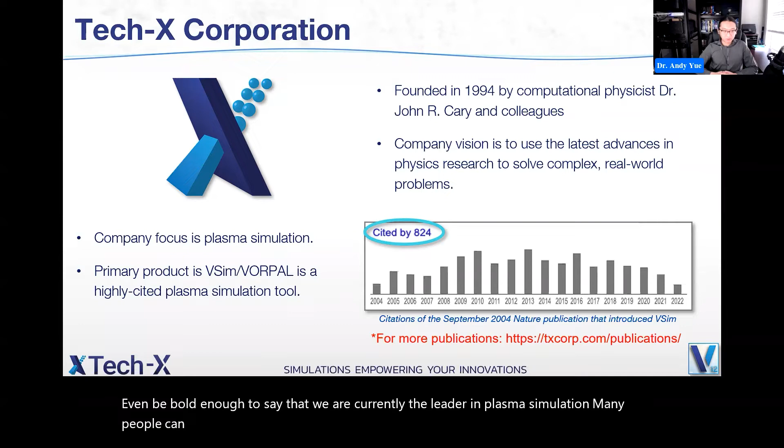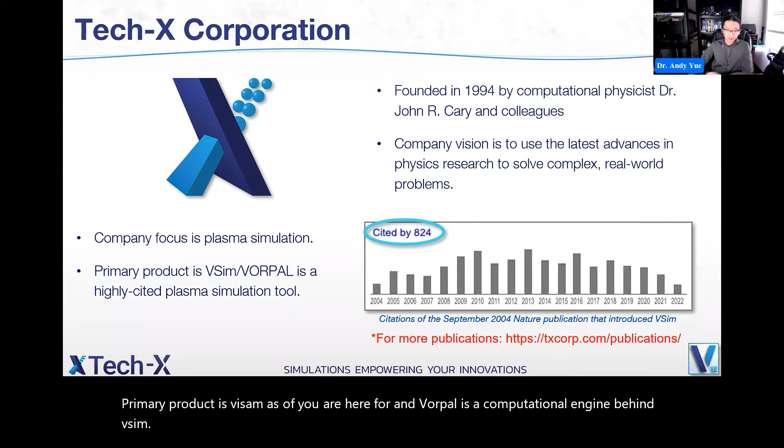So our company, TechX, has a focus on plasma simulation. And I would even be bold enough to say that we are currently the leader in plasma simulation. Many people can do electromagnetics. Many people can do ordinary particles. Not a lot of people can do plasmas. So our primary product is VSim, as all of you are here for. And Vorpal is the computational engine behind VSim. So let's go to the next slide.

So what is VSim? VSim has multiple physics solvers. We solve fields, that's electromagnetics and fluid. We solve particles, that includes charged particles like electrons and ions, and it also includes neutral particles as well. And we solve collisions and reactions, that is the interaction between particles, such as ionization, recombination, excitation. And we solve all of these in self-consistent ways, simultaneously, and the result can be trusted and is robust.

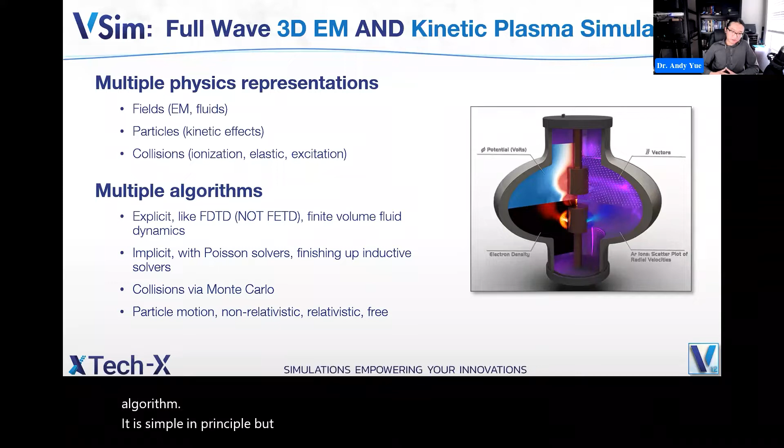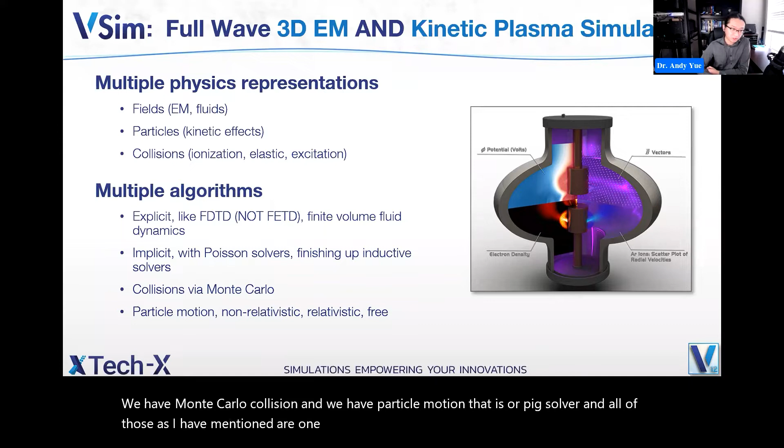So we have many different solvers. The main solver we use is FDTD, that's finite difference time domain. So VSim is a time domain solver. And finite difference is a very, very robust algorithm. It is simple in principle, but it's not really that simple to implement. There are many nuances there. And we also have implicit solvers like Poisson solvers and inductive solvers. We have Monte Carlo collision, and we have particle motion, that is our PIC solver. And all of those, as I have mentioned, are one unified self-consistent whole.

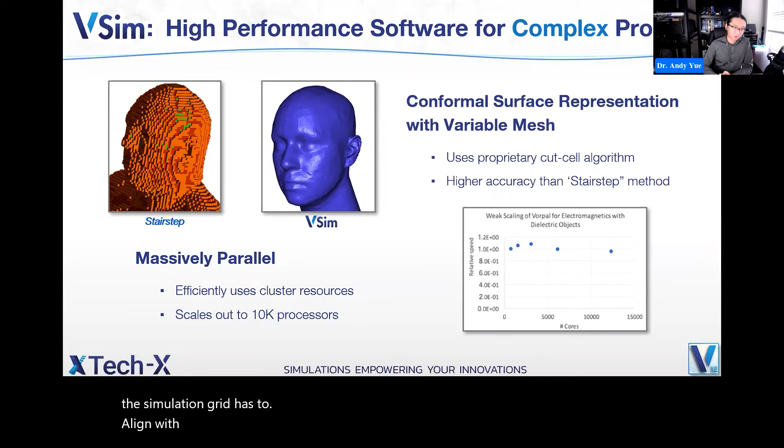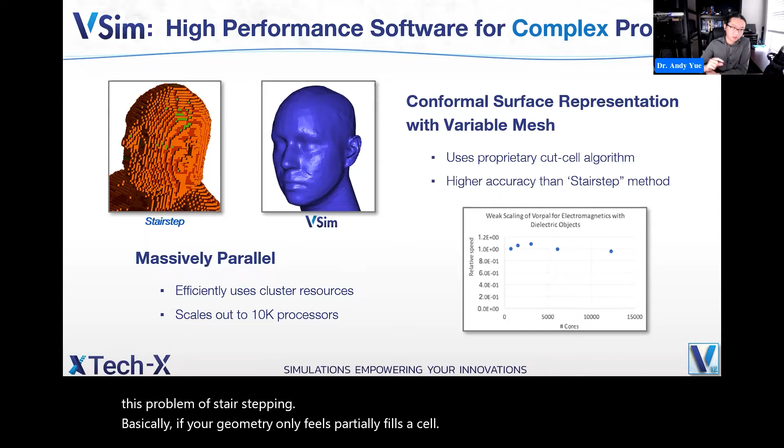So one main advantage of VSim: if you know anything about finite difference solvers, the simulation grid has to align with whatever coordinate system you're using. So in Cartesian coordinates, you have this problem of stair stepping. Basically, if your geometry only partially fills a cell, with stair stepping, you either count the cell as entirely filled or empty. But VSim has a conformal surface representation with its cut cell algorithms, and we are able to have a much finer resolution of the simulated geometry and hence improve accuracy.

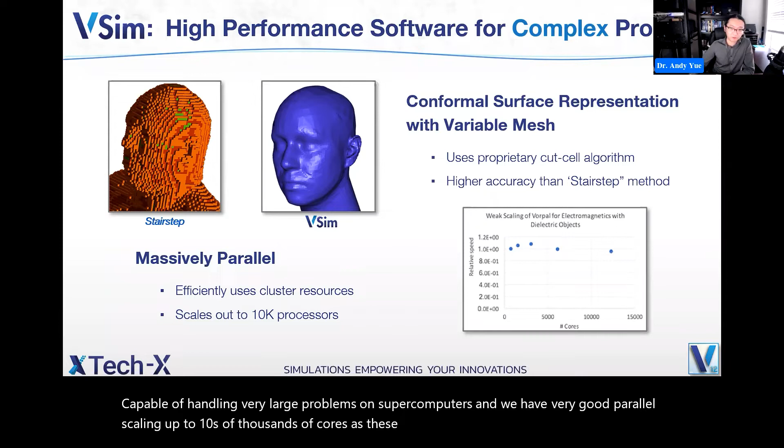And VSim is a massively parallel solver. So we are capable of handling very large problems on supercomputers. And we have very good parallel scaling up to tens of thousands of cores, and these are tested and confirmed numbers.

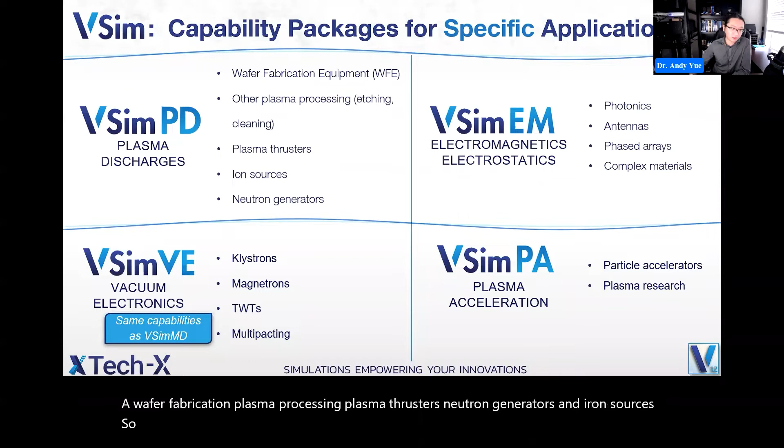So VSim is currently divided into 4 different packages depending on their capabilities. Our flagship product currently is VSim PD. PD stands for plasma discharge. This product is intended to solve problems such as wafer fabrication, plasma processing, plasma thrusters, neutron generators, and ion sources. So this package is great for anyone who is doing reactions, plasma chemistry, and especially processing. We will talk about that more a little bit later.

We also have VSim EM, which stands for electromagnetics. These applications include your ordinary applications such as antennas, phased arrays, electromagnetic waves in materials, and more importantly, lately photonics. We are able to go to very, very high frequencies while maintaining stability.

And we also have VSim VE. VE stands for vacuum electronics. This package used to be called MD. We changed the name in this release to align with industry conventions. So these applications are klystrons, magnetrons, TWTs, and multipacting. Basically, applications that have anything to do with beam-field interactions.

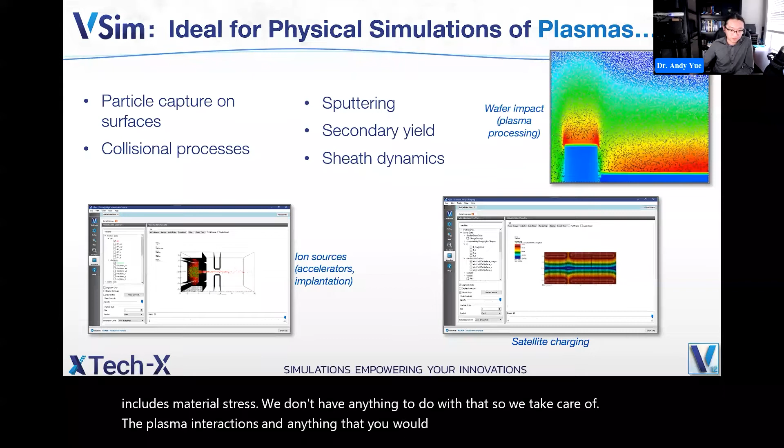And I would mention here that what VSim does not deal with currently is anything mechanical. That includes thermodynamics, that includes material stress. We don't have anything to do with that. So we take care of the plasma interactions and anything that you would consider electrical.

So VSim is also capable of solving computationally intensive electromagnetic problems. And as I have mentioned, we have conformal PECs and dielectric algorithms. Conformal means we are able to go into the subcell level and take care of complex geometries within the cell.

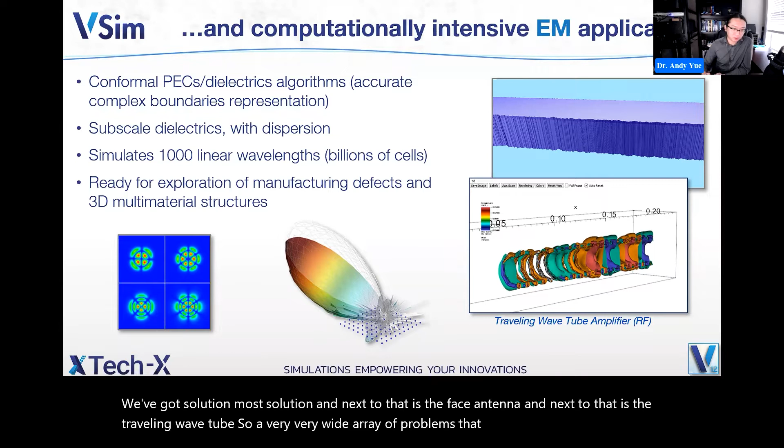So we can do problems, as you can see here. On the bottom left corner is a problem of a waveguide solution, mode solution, and next to that is a phased antenna, and next to that is the traveling wave tube. So a very wide array of problems that involve either fields alone or fields and particles together.

So what is new in VSim 12? In VSim 12 the big improvement is in the plasma discharge arena. So we added a flexible reactions framework, and we also added a lot of very widely requested examples such as magnetron sputtering, and we added some neutral fluid, and we also added a lot of what I would call quality of life improvements, such as parameter scans and a time averaging analyzer. So I will talk about some of that in more detail.

And if you are already a current user of VSim, you will be receiving a detailed release note on all the improvements that come with this iteration of the software.

So we have an improved reactions framework. The reaction framework now features an unlimited number of reactants and products. I know more than one person already that would really appreciate this feature. And reactions can now be localized to geometric surfaces. We have added new reaction diagnostic tools for improved understanding. And also, collisional cross-section files can now be imported from new formats.

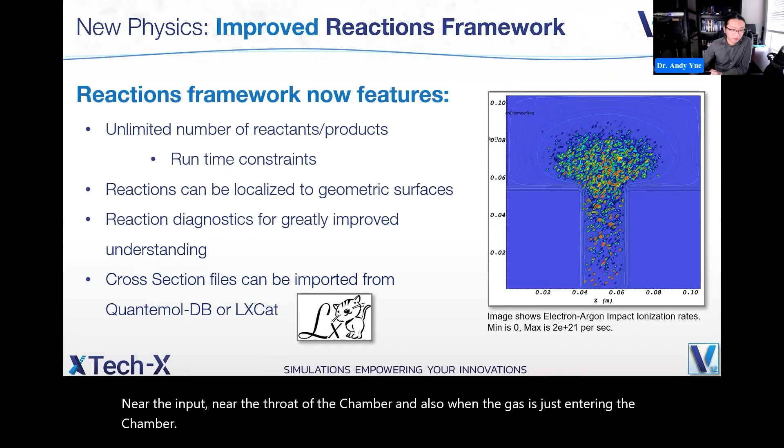And the image you see on the right is electron-argon impact ionization. The colors you are seeing are the ionization rates. So the hotter the color, the higher the rate. So as you can see, in this case, there is a very high rate near the input, near the throat of the chamber, and also where the gas is just entering the chamber.

So this is a quality of life improvement. A lot of our competitors already have this, and we are a little bit late, but it's finally here. So now you can scan multiple parameters. You can do parameter scans natively in VSim Composer. So this allows you to run several simulations at the same time. And this is highly helpful if you are doing any kind of iterative solution, or if you are unsure about your design parameters and you just want to try out a bunch of them.

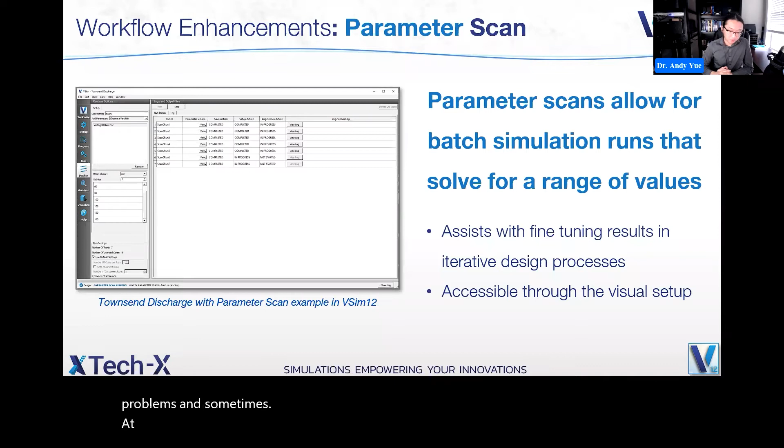And one of the biggest things about this is if you are dealing with very large problems. At least for me, one issue I used to run into is that I start a simulation in the day, and then the simulation will be finishing in the middle of the night when I'm asleep. And I wouldn't have time to immediately do the next iteration. And in that case, I waste half a day of computational time on my server.

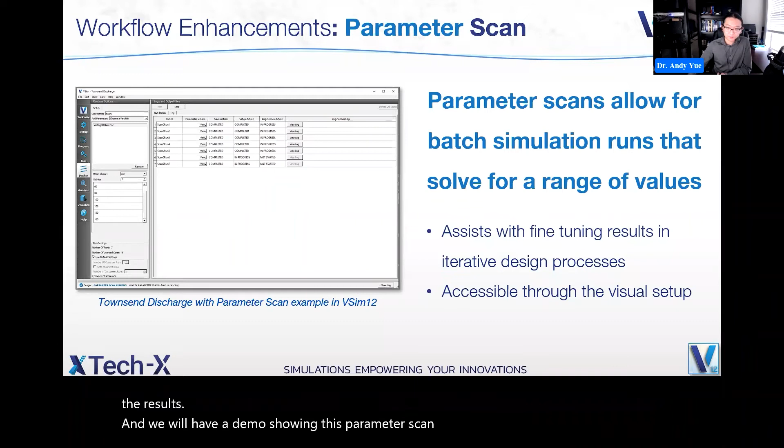So this tool helps you solve that problem. Especially when working with very large problems, you can set up all of those parameter scans and just forget about it. Then when you walk back sometime later, it's all done for you, and you can begin to review the results. And we will have a demo showing this parameter scan working later in this presentation.

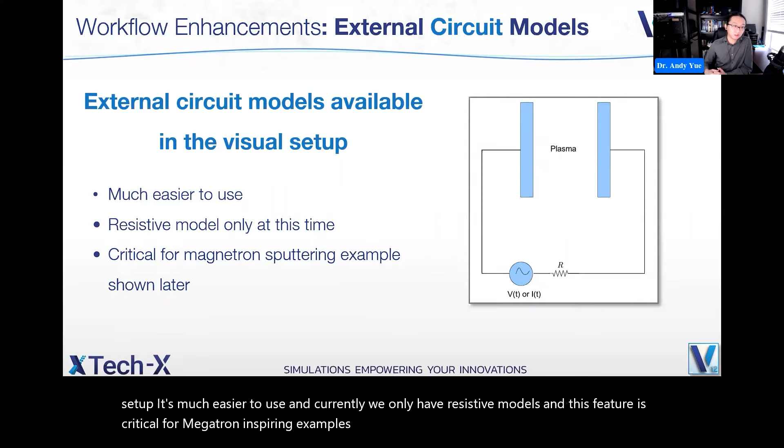And we have added external circuit models in VSim, now available in Visual Setup. It's much easier to use, and currently we only have resistive models. And this feature is critical for the magnetron sputtering examples that will be shown later this week.

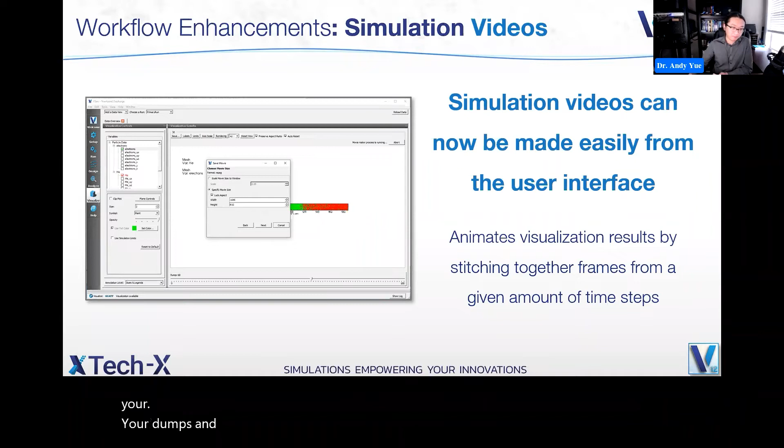And another feature we have embedded into VSim Composer is that you are now able to make simulation videos natively in VSim Composer. So this allows you to make an animation based on your simulation results. It sequentially attaches together your dumps, and it will give you a movie.

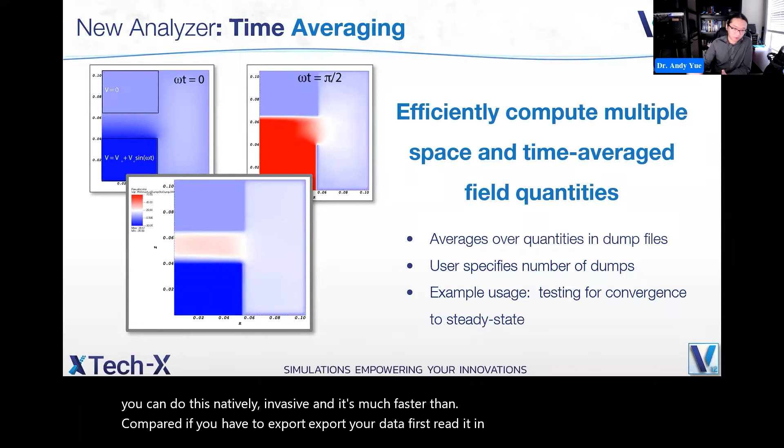So a new analyzer that is added is that you can now do time averaging natively in VSim. I know a lot of our power users are probably already doing this in Python in post-processing, but now you can do this natively in VSim, and it's much faster compared to if you have to export your data first, read it in Python, and write your own script to do that. Now you can do that natively in VSim.

And we have added this new example for Magnetron sputtering. I can tell you this is one of the most widely requested examples or applications VSim gets these days. Everybody seems to be interested in Magnetron sputtering, and we finally have an example for that.

So VSim simulations can now be used to determine the optimal setup conditions for Magnetron sputtering, but users will need to provide the magnetic field data. External circuit model is critical for obtaining steady state. And if you are interested in working with this type of applications, we strongly encourage you to work with a TechX application engineer.

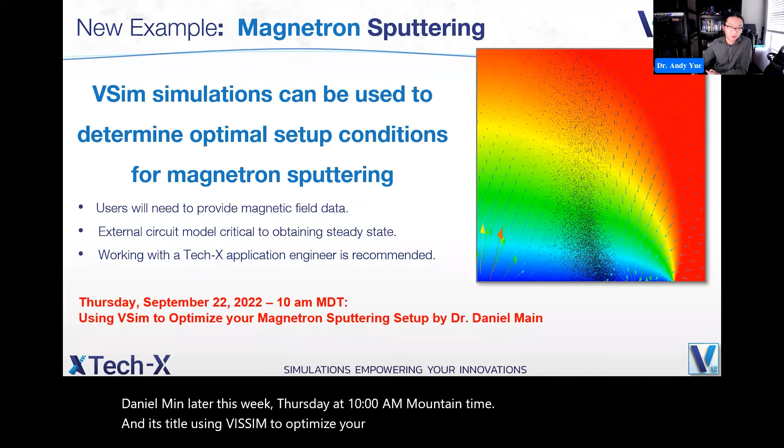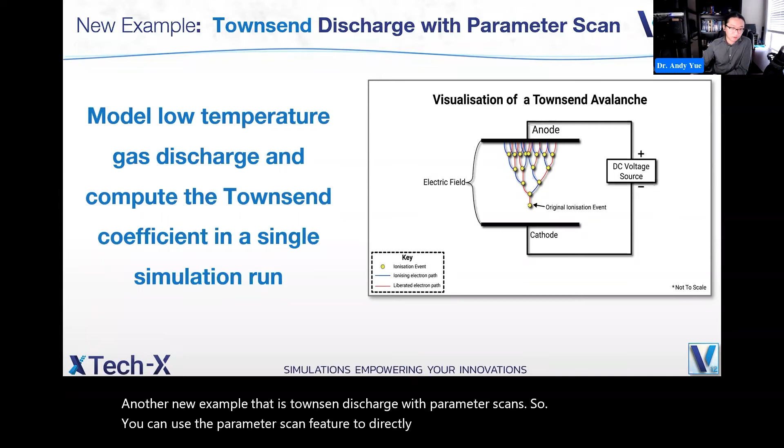And we have added another new example that is Townsend discharge with parameter scans. So now you can use the parameter scan feature to directly obtain the Townsend coefficient of a setup. So in this case, we will do this example as a little demo. We won't go into the physics of this whole thing.

What you need to know is that Townsend is basically an avalanche type of behavior, and originally it's a plasma process that amplifies current. So there is this very old paper published in 1964 by Channon and Rourke. And I believe those are two engineers at Honeywell, and they have determined that for this set of parameters you see here, we should be able to get a Townsend coefficient of 1.3.

So the Townsend coefficient here is alpha, and P naught is the pressure. So this number is experimentally determined. And now what I'm going to show you is how you can use VSim to produce this number. So with that, let me stop my share, and I will pull up VSim12.

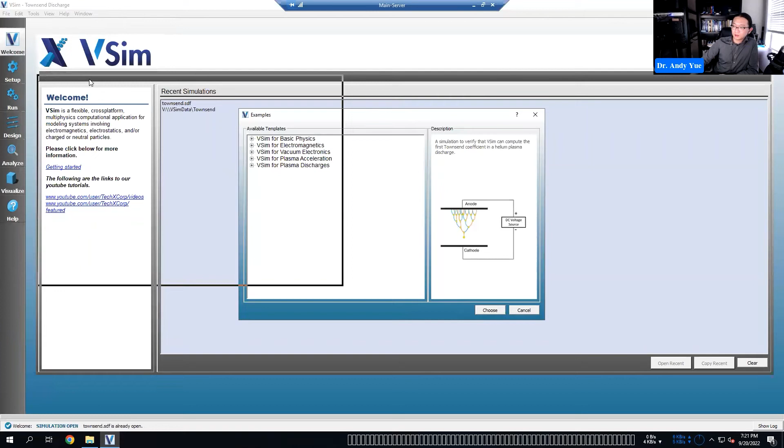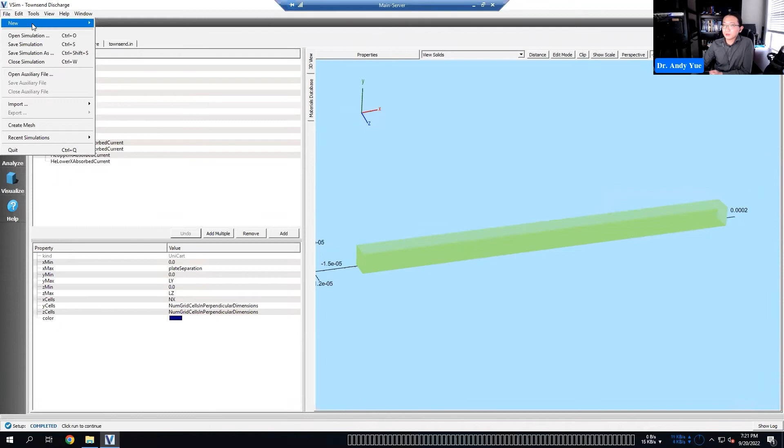So to access this Townsend example, simply go to File, New, From Example. This Townsend example is under plasma discharge process, Townsend. So here I already have one opened. When you open it, you are going to see here. So this setup is relatively simple, as you can see from that example image. The setup is a parallel plate with a voltage in between, and in this case, there's also helium in between.

So in this case, when you set it up in VSim, you don't need to include explicit geometries. You can simply define a boundary as your geometry. So I won't go over the setup. If you are interested in how this model actually works, or if you are interested in exploring the background physics, I will point you to a really helpful documentation.

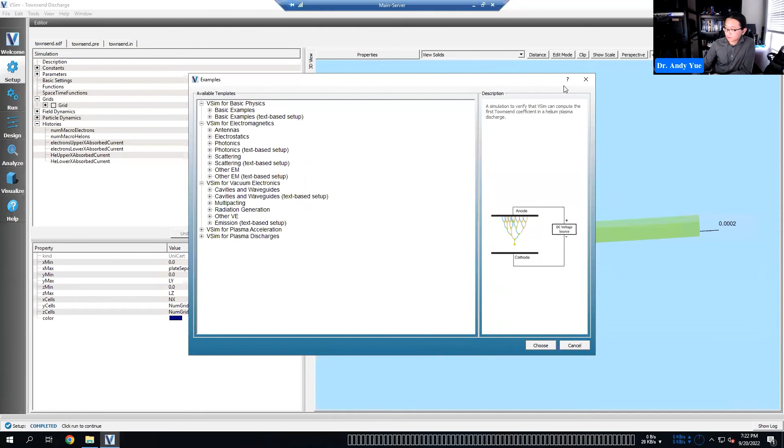So for all of these examples you see under every category, we have extensive documentation for every example we have. And to access that, you simply go to Help, click on that, and that is going to pull up VSim documentation. To access this example, go to VSim examples. This example is under plasma discharge, or you can simply search for Townsend or TOW. And here you can pull out the problem description, and this documentation will run you through the entire example, including the background physics.

So in this case, what are we trying to do? Let me pull up a pen. We're essentially trying to solve this equation here. We want to solve for alpha. We have an input current, and we have an output. We can simulate the output current, and we can control x minus x naught, which is the separation. But in this case, we scan the voltage instead, which gives the equivalent effect.

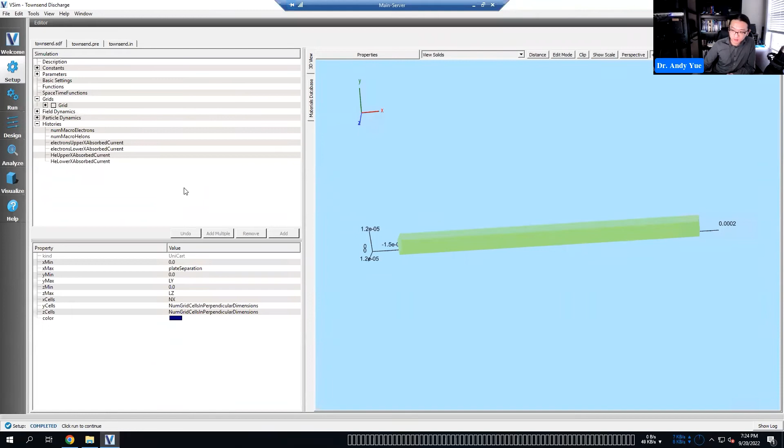So we want to have an array of input current, then we simulate an array of output current based on our different voltages. And by that, we can calculate what this alpha value is, which we have experimental data for. So to do that, let's go back to my example. And typically, at this point, after setting up your example, you will go to run. And when you click run here, it will run whatever your setup is here.

But if you want to run multiple setups at the same time, now you go to the design tab, and here is your parameter scan interface. So in this case, you give it a name. I mentioned I want to have the equivalent effect of different separations by scanning the voltage. You can scan other things too, like if you want to scan pressure, you can.

You can even scan more than one parameter at the same time. And that will give you a matrix of all combinations of whatever number of parameters you input. So if you have 3 different values for parameter A and 3 different values for parameter B, you will have 9 different parameter scans, 9 different cases.

In this case, we only scanned one single parameter, and this is the voltage between the parallel plates. To do the scan, you can scan a list of values. In this case, you will be manually inputting every value you want calculated for this parameter, voltage difference. Or you can scan a range. In this case, you tell VSim what is the minimum value, what is the maximum value, what is the number of points you want to scan, and whether you want to do a log scan. You can even do random values if you just want to try random things.

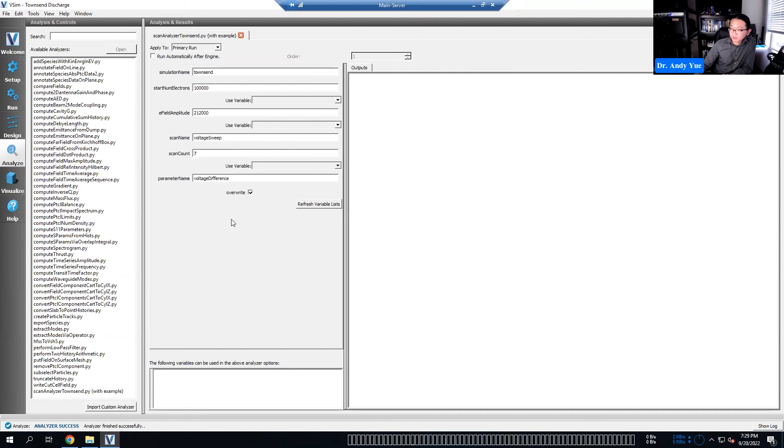You can obviously compute alpha on your own with post-processing in Python. But in this case, we actually have an analyzer that is built into VSim12 that automates this process. And this analyzer is simply called Scan Analyzer Townsend. After you input your desired parameters, you tell the analyzer which parameter you scanned, in this case the voltage sweep, and you have 7 different cases.

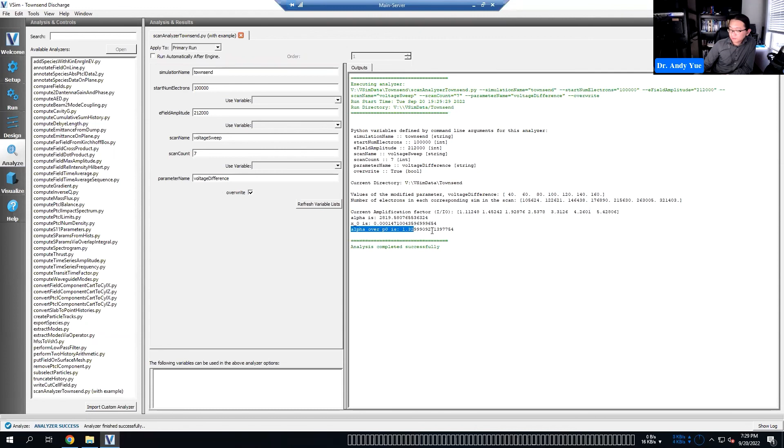Now if we click analyze, it's telling me that my alpha over P naught is about 1.3, which is the experimentally confirmed value here. And if you want to see the original paper, simply Google this name, you will see that paper. It's a very well-known paper. So that is parameter scan in VSim12. It's mostly a quality of life improvement, but a very important one. And I will stop sharing this screen, and let's go back to the presentation.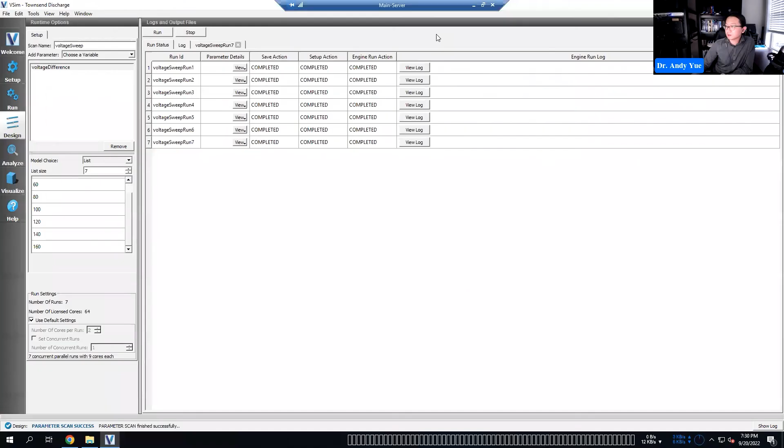All right, so we just went through this. And that is all I have for you for this webinar, an overview of VSim12 and an overview of the new features. I didn't touch on everything. As I said, you are going to get a release note, and I'm pretty sure you're going to find it interesting.